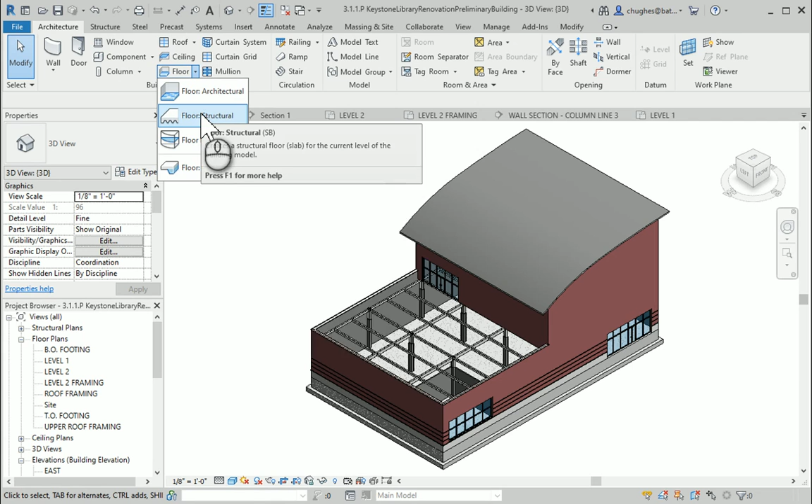With that, we're going to go to the floor command. Rather than using the roof command, I'm going to use the floor command, hit the drop down arrow, and choose floor structural, because in the floor command we have the ability to actually see the metal decking, even from the icon, and have that show up in our section. It doesn't show up in the roof command, so it's kind of interesting Revit hasn't brought that in yet, but I'm sure it will be forthcoming. Here I'm going to choose floor structural for our green roof.

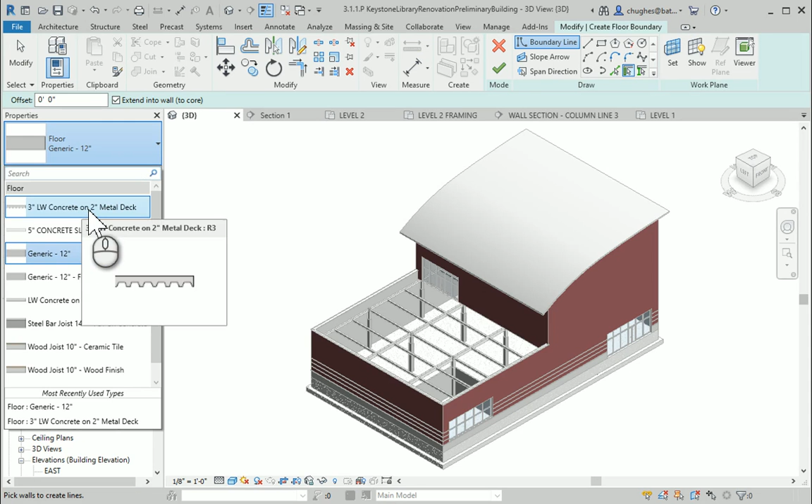For our floor, we want to choose something pretty similar, so I'm going to go with the 3-inch lightweight concrete on 2-inch metal deck. Then I'm going to edit the type, duplicate it, and just call this green roof.

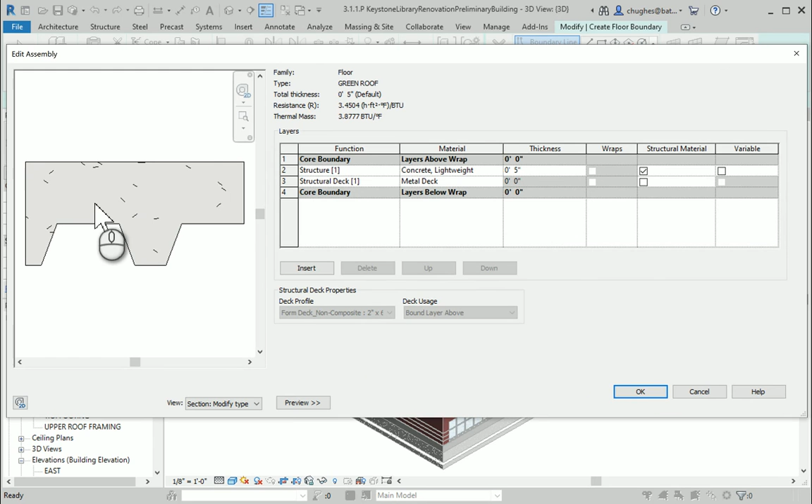When I do so, I'm going to edit the structure, and within here take a look at the kind of structure. You can see this is lightweight concrete, and the decking has a thickness of 0 inches. What happens is the decking is very thin, and then they pour concrete over the top of it to hold that. So what we're going to do is select the structural deck, and it says it's bound in the layer above, meaning the concrete is actually encasing the metal decking.

So I'm going to go ahead and choose a standalone deck instead. Now you're going to see that thin layer, 2 inches of decking, and then 5 inches of concrete that's going to work in that case.

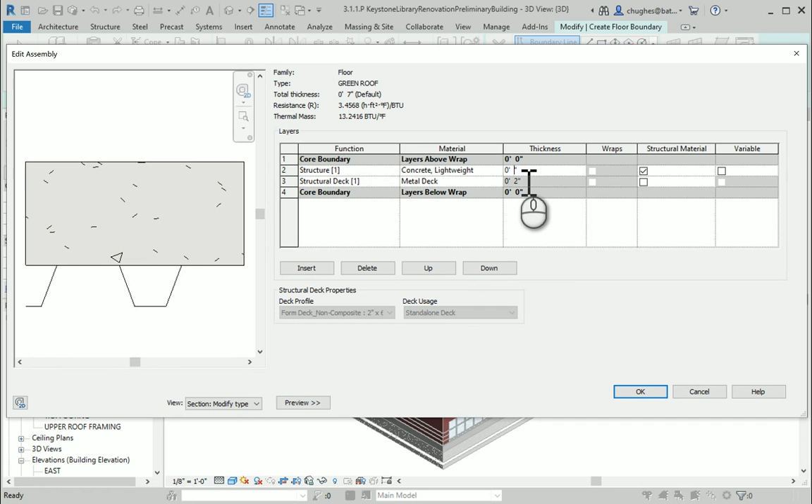Now for the concrete, we're going to keep that, but I'm going to change this over to 4 inches. Typically 4 inches is about the thickness for the concrete used for our particular green roof, noted by the loads that are going to be carried, the spacing, and the design of our structural steel framing.

And what I'm going to do is start adding in some different layers. I'm going to insert a layer and move this up above the core boundary. The first thing we're going to have is change this over to a finish, and by category, choose a material.

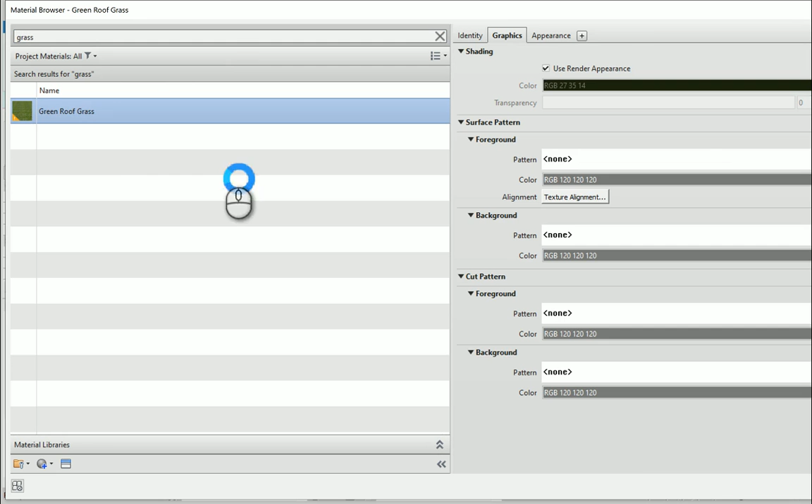Now, because this file was pre-made and given to you, you're going to end up having grass as an option, so I go through and choose grass for the green roof, and say OK. Then for the thickness, we're going to use about 3 inches, which is about the height for the grass. That'll show in your section view now.

I'm going to insert a new layer and move this down, so this becomes another finished material, and this is going to end up being our earth. If I start searching for that, this is our growing media that we're going to have, and they usually put about 3 inches on there.

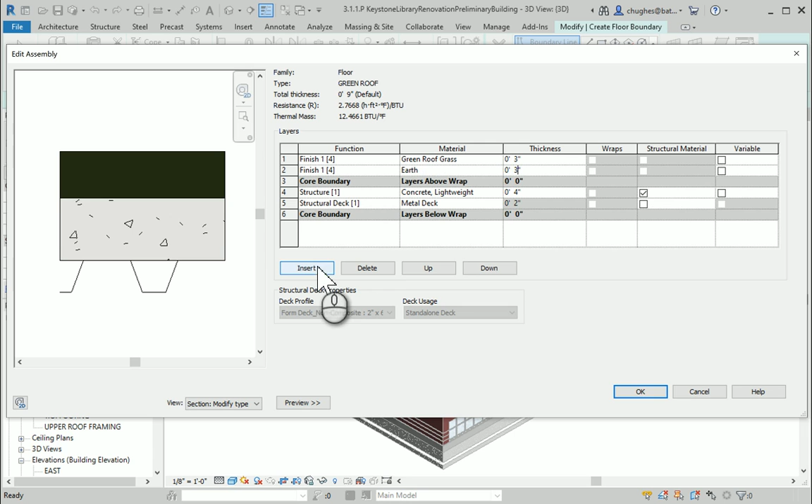I'm going to say insert, make sure to move this down, so this is going to be another finished material.

We're going to choose in your material listing, for fabric there's a mesh fabric that gets put in, and the fabric is probably about 1/8 of an inch. So when I click inside of there and place that, I'm going to say insert and bring in a new material.

Here we're going to end up having another finished material that we'll put on. By category, we're going to end up choosing gravel, or some granular drainage, as a lot of these are noted. 2 inches for the thickness. And then we're going to add another fabric layer below that.

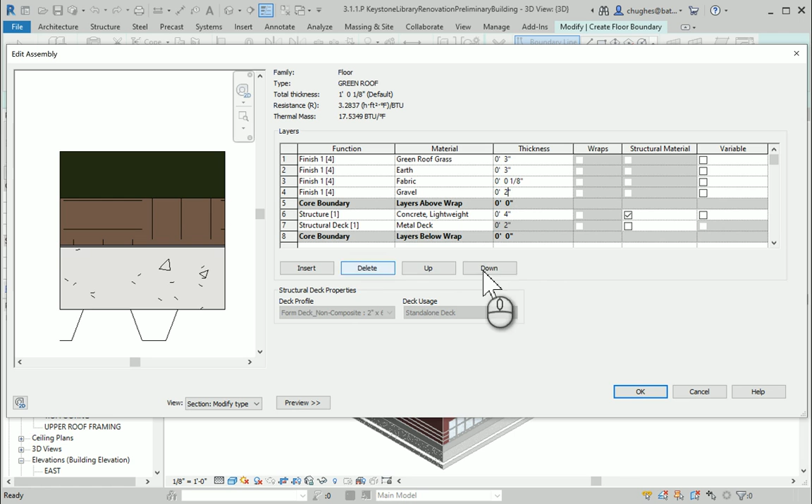So I'm going to insert and move this down. This will be another finish, but actually it'll be a thermal air layer as far as the function. And we're going to add another fabric layer in there, which is going to end up being kind of like our drainage fabric that we have below.

That's going to be another 1/8 of an inch for the thickness. And then I'm going to go ahead and add in 2 more layers, which are really not going to show up on our section view, but these are going to be a membrane layer on both of these.

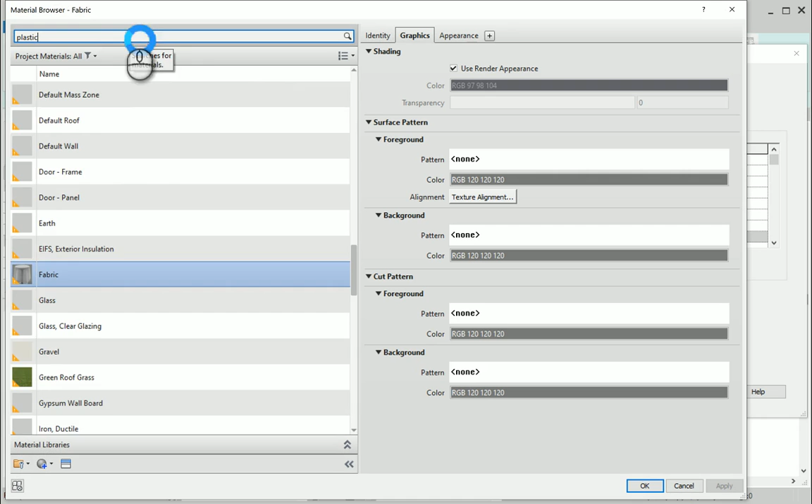The one on row 6 is going to be a plastic, kind of like a drainage mat or something like that. So here, plastic is an option, a kind of translucent plastic that's laid in. So it's going to have a thickness of 0 inches. Same thing on row 7.

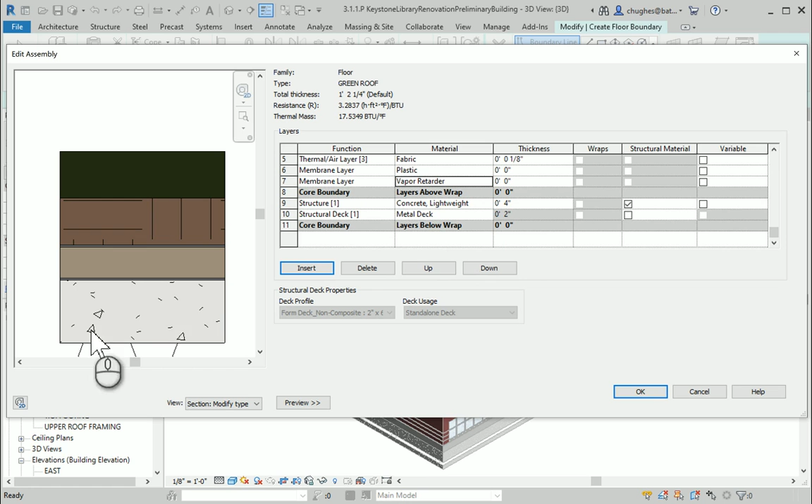We're going to go through and have a vapor barrier. So if I search for vapor retarder, it can be used, and it's going to be set at 0 inches as well. This is going to have our green roof material all set up in this case. So I'm going to go ahead and say OK.

So here you're going to see one thing we'll note: the default thickness is 1 foot 2 1/4 inches, which they say the nominal thickness of a very extensive green roof should be about 15 inches. We're right in the ballpark of what that should be. So I'm going to go ahead and say OK.

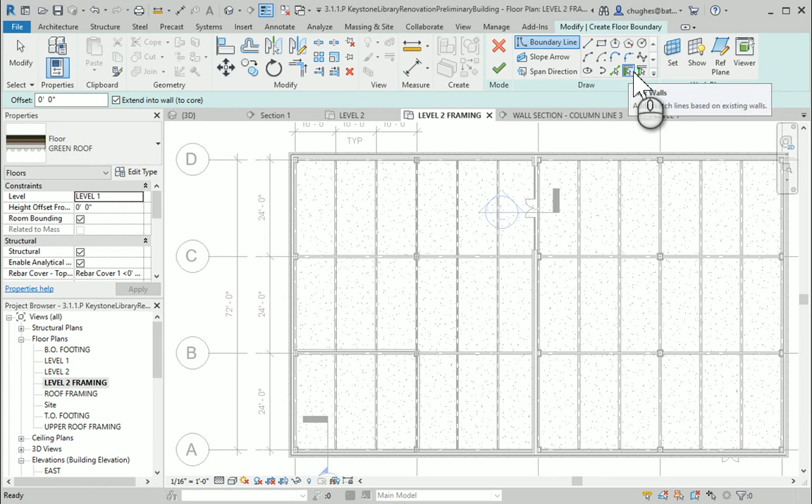Now I can go through and move to the level 2 framing, since I started this in the 3D view. I'm going to choose pick walls up here—make sure I choose the one right before, not the one on the very right. I'm going to choose the 3 walls here, and the 4th one as our wall on column line 3.

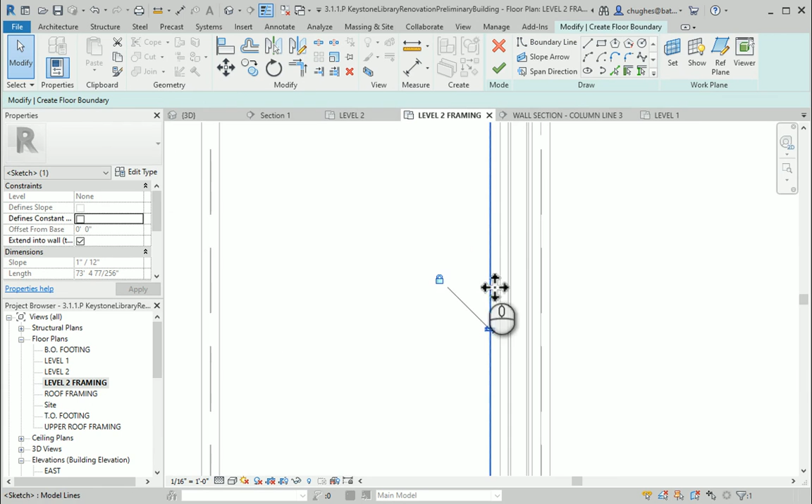However, the wall underneath there, the flooring of our inside floor, is going to be what supports it. So I'm going to hit cancel a couple times, grab this purple line, have it snap to the outside edge, and lock it. I want to snap to that outside edge of the wall, not to the inside.

This is because our wall there on column line 3 is going to get supported by the flooring on the inside of the building when we go through and do that. I'm going to go ahead and hit the green check mark, and here I will go through and take a look at my 3D view.

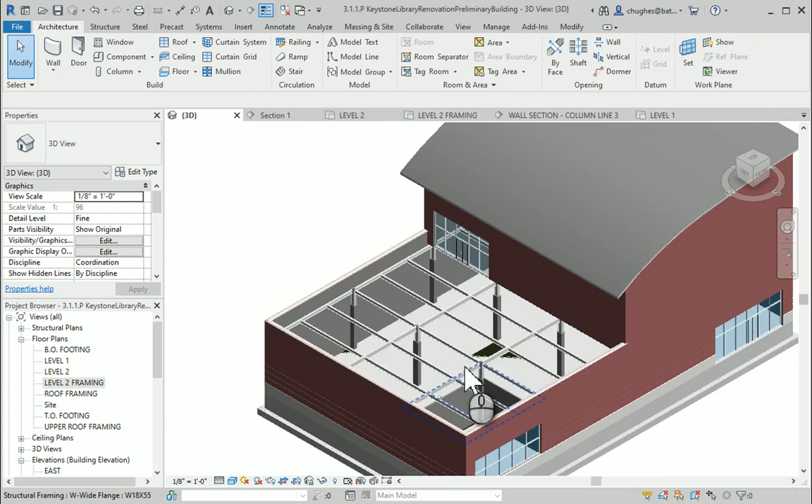So here was the issue though. If you look down here in the bottom, I didn't check my levels. So that's an easy fix.

So when I hover over that floor, there it is. So because I was in that 3D view, here are the levels on level 1. Let's go ahead and change that to level 2 framing and hit apply. But it still doesn't really fix the issue.

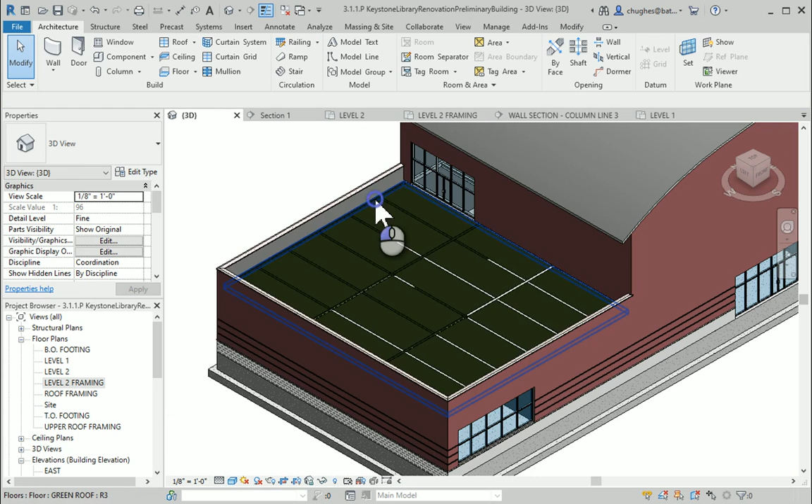So we can see the embedded beams that are inside of there. I'm going to go ahead and select the flooring again, but I need to height offset it by the thickness of the floor, because the floor always goes where the top level of the floor is aligned with the level we have associated. So I'm going to height offset this by 1 foot 2 1/4 inches. Say apply. It's going to bump this up, and now we go through and have our green roof.

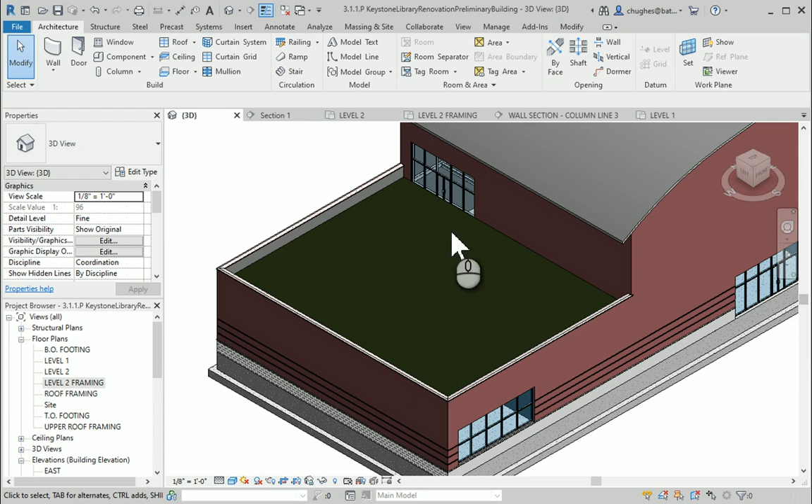If I hide, let me hide this wall actually. If I hide this wall, you're going to be able to see as we look. Now one issue you're going to end up seeing here in a moment is that the bottom of our door gets cut off by the green roof, which I noted in the previous video that we'll probably go through and do.

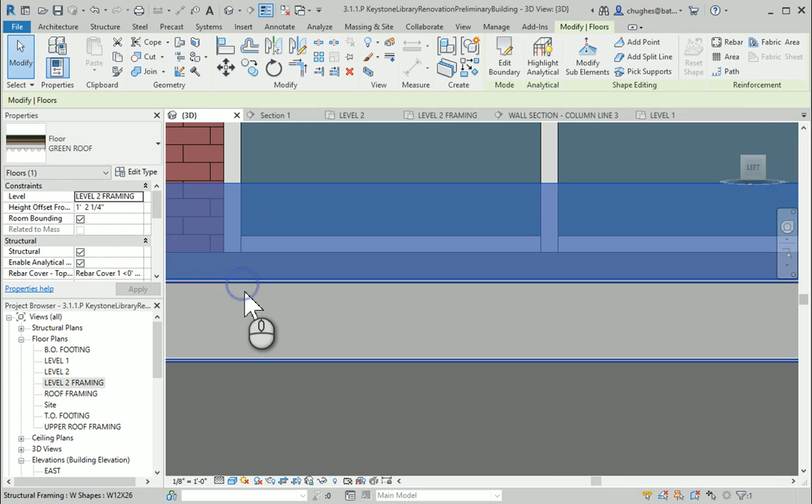But here's our green roof, and there is the top of our beam. So you can see the beams are supporting the green roof, and everything is going to be located just as such. That's exactly what's kind of going on there. So the columns are supporting it as well.

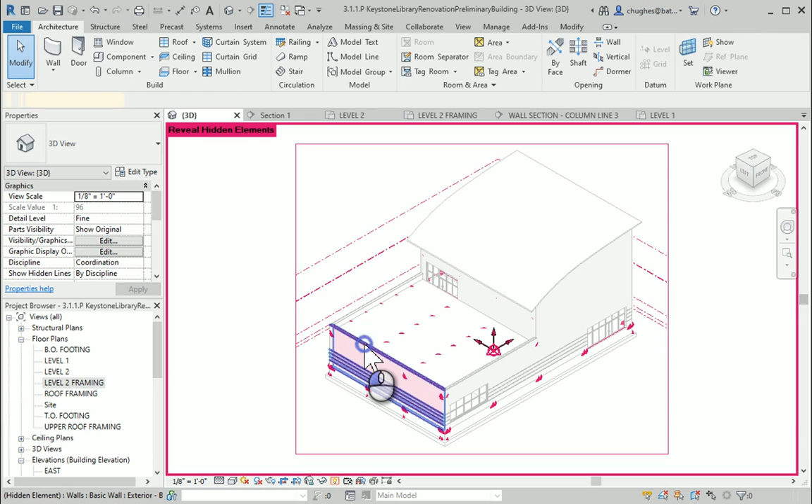So there's our green roof, and what we can do in this scenario, now that we've created it, is I would recommend creating a level for the green roof in order to start adding in your various elements, furniture, anything you wish to decorate the green roof with.

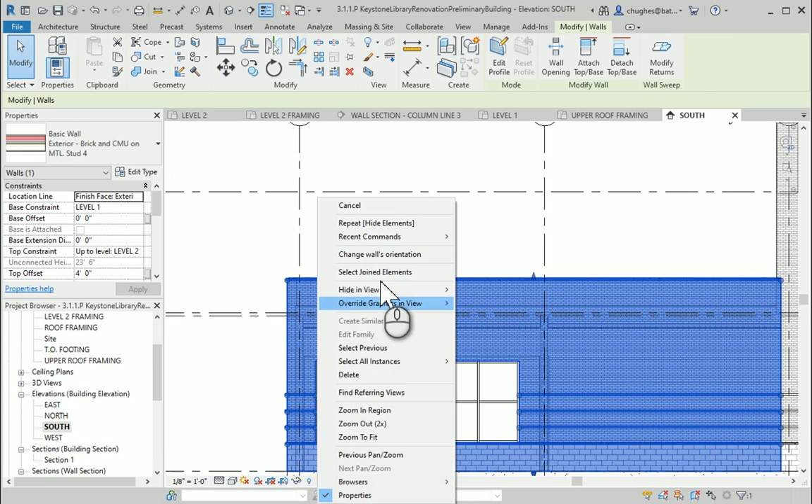In order to do so, I would go to the architecture tab. We cannot choose level from the 3D view, so I'm going to move to the south elevation. I'm going to go ahead and hide this wall here, and that way I can see the height of the green roof, and you can actually see the decking that's there that's been laid down.

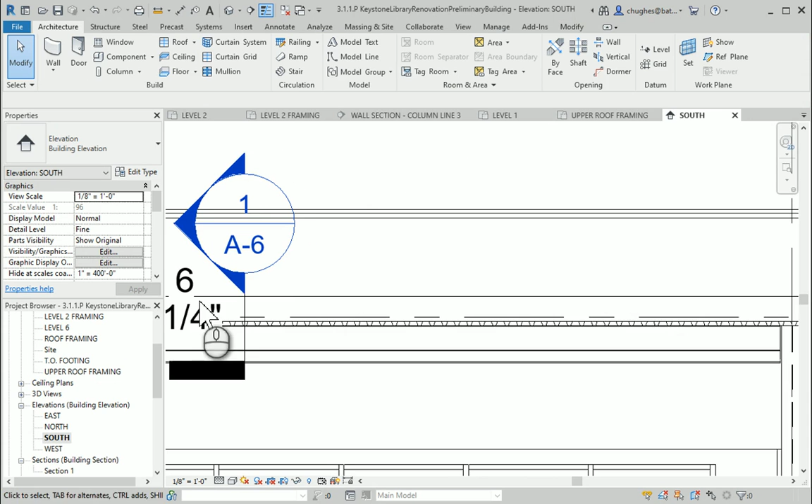I'm going to go under the datum panel and choose level, and this time I'm going to choose the pick line option. I'm going to pick the top of the green roof, which is going to get renamed to level 6. When it automatically throws a label on the left side, I'm going to use the white dot to extend out the level line until it matches with the others. Then I'm going to check the box to have level 6.

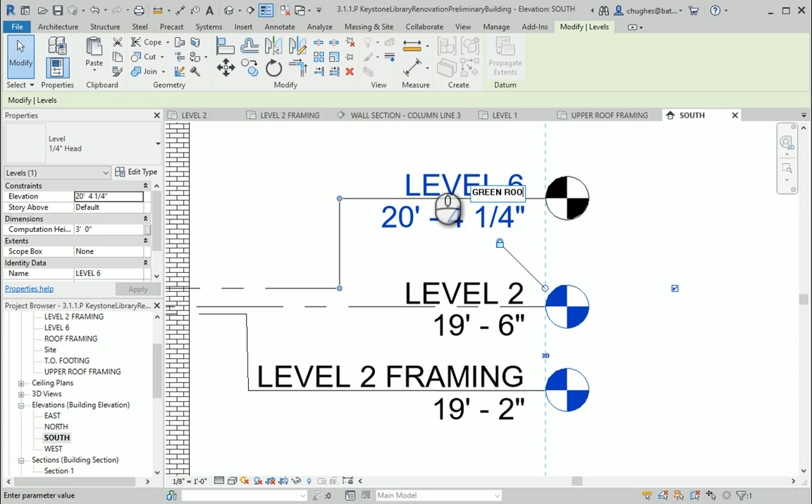I may need to create the bend in there, drag this up. I'm going to pull this back just a little bit so that we're not impeding into level 2. And level 6 we'll rename to green roof. Yes, we do want to rename the corresponding views.

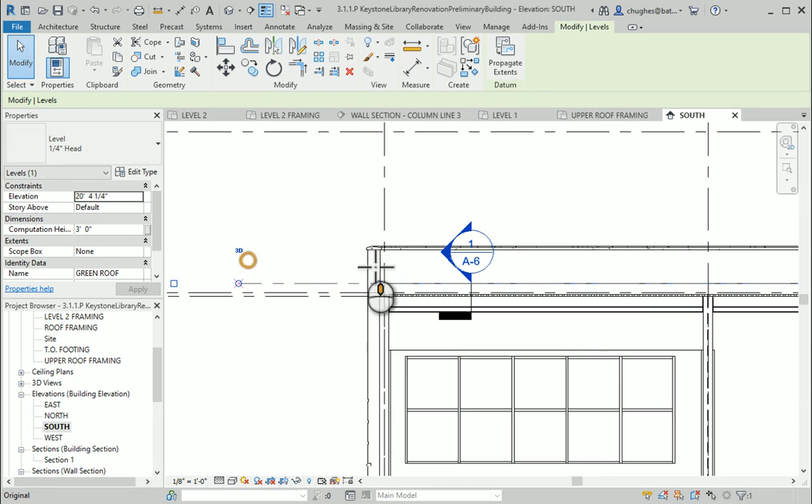And it looks like I need to drag this back just a little bit more. I always like to have the title directly above the line, directly underneath the title all the way. Then on this end, when I select this end, I can uncheck, and I'm going to drag the line out to match the lengths of the other level lines.

Now I have a green roof level that I can go through and use. I'm going to go ahead and bring my wall back in this view before I forget. I always like to remember to do all that.

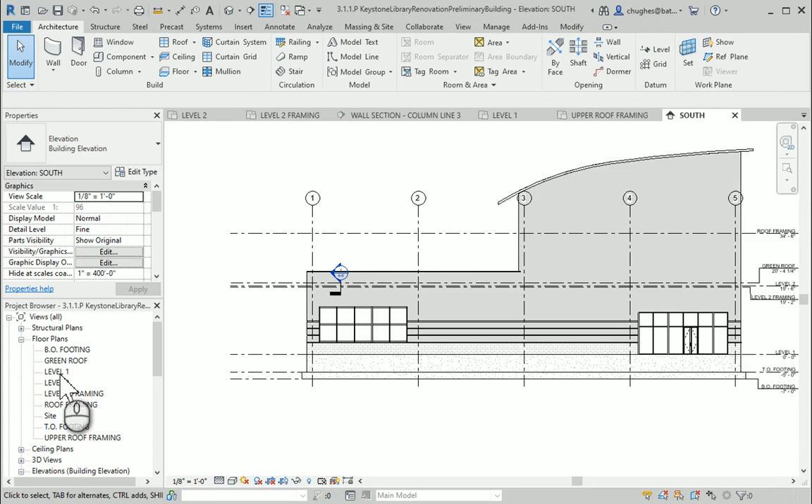Looking at our 3D view, there is our green roof, and in another video we can take a look at what we can do to start adding to our green roof level and start kind of decorating it and creating some new kind of spaces and things.